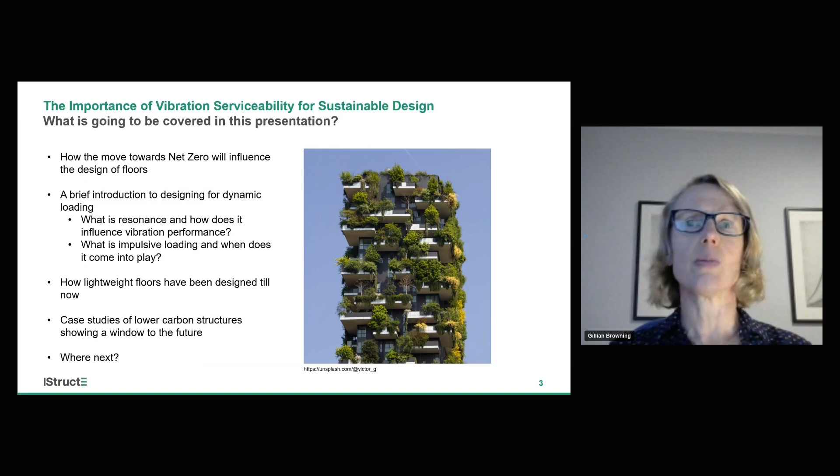So now, because we're on quite a tight time schedule today, I will be following my notes quite closely so that I try not to miss any key points, and also hopefully that will stop me going off-piste, which I do have a habit of doing. So, right, let's get started.

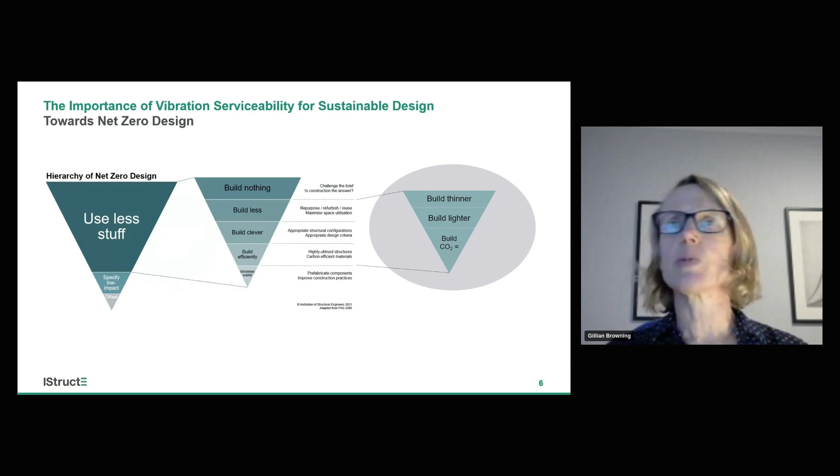This aspect of sustainability, with a focus particularly on floor design, is what we're going to explore today.

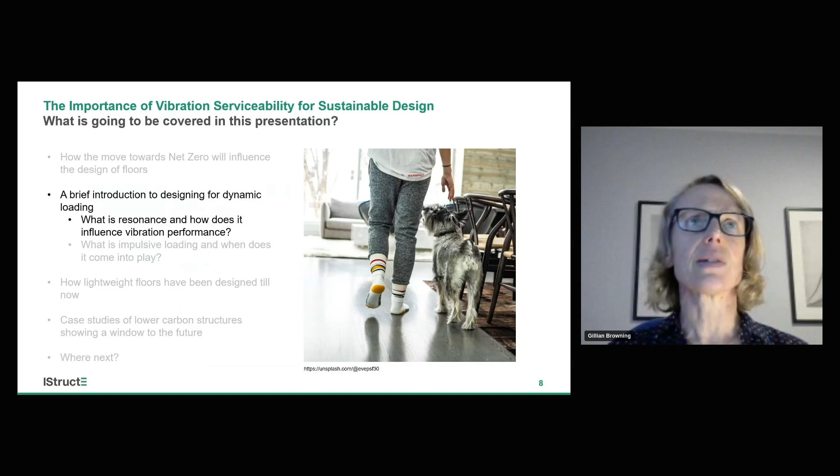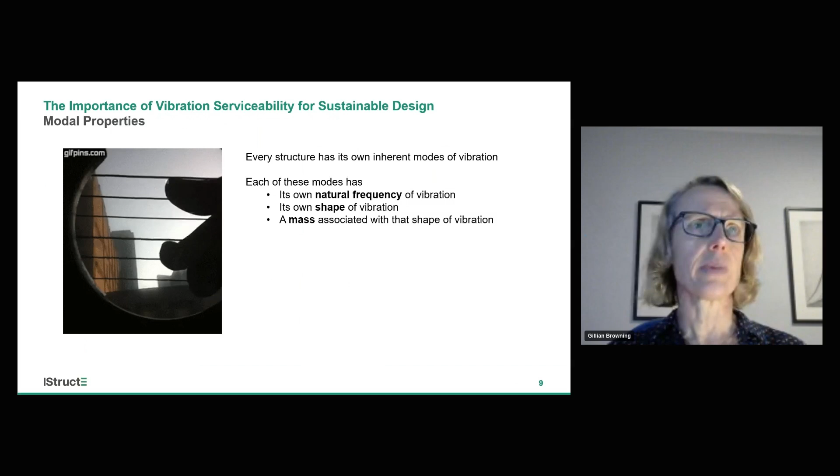One of the key concepts of dynamic response is resonance. Resonance is where an external dynamic force is at the same frequency as one of the modes of vibration of the structure, and repeat application of this external force causes a greatly magnified response.

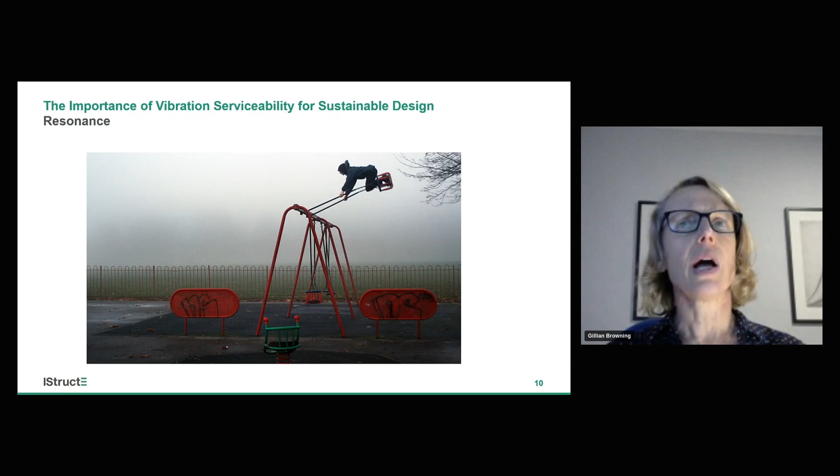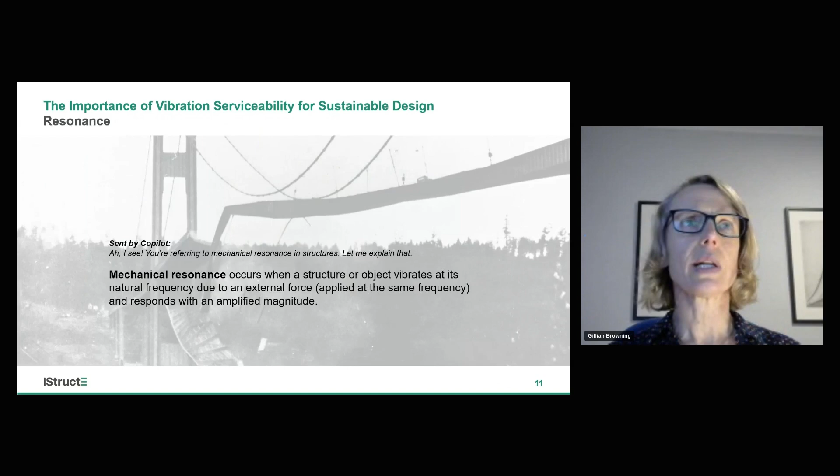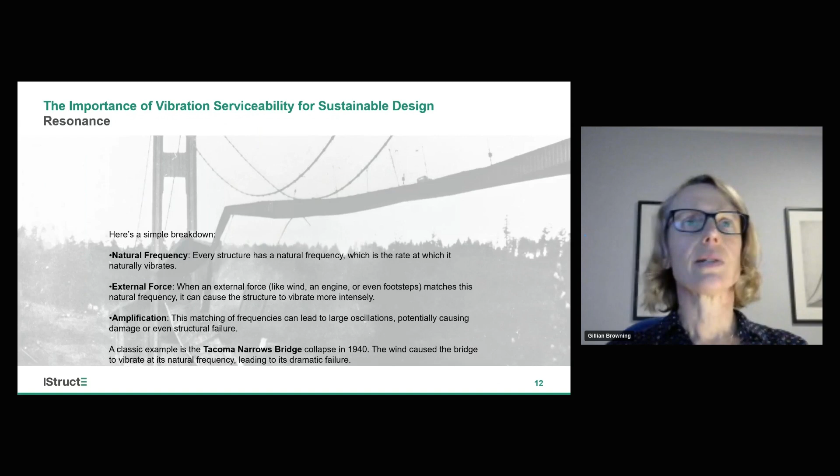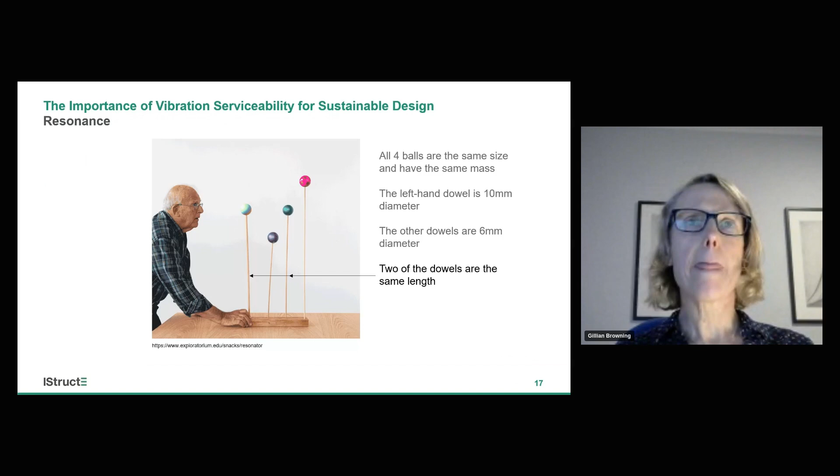But most importantly, all four stick structures have different natural frequencies. The man on the left is moving the base of the device at varying frequencies, and when this excitation frequency matches the frequency of one of the sticks, you can see that it clearly resonates and moves with a greatly amplified response.

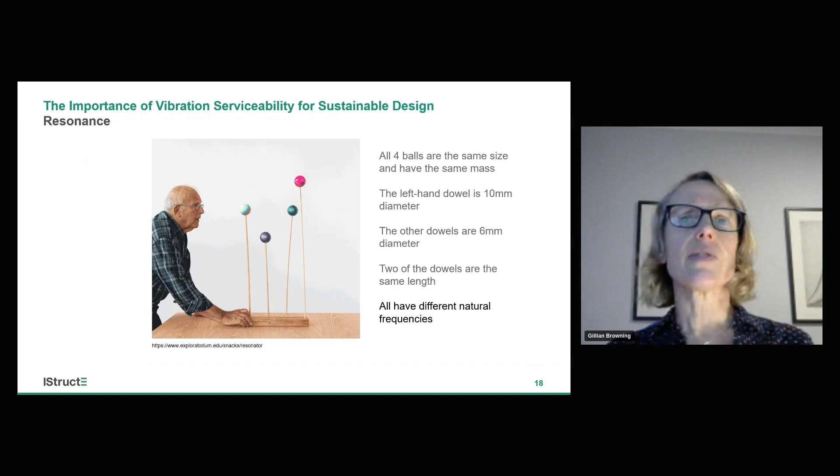Then, as he changes the excitation frequency, that ball will vibrate less. So for each key excitation frequency, only the stick whose frequency is being matched oscillates madly, while all the other sticks remain largely still. This is another key concept of dynamic analysis: when a structure is excited at or close to its natural frequency, you'll get a magnified resonant response, but if it's excited at a frequency away from its natural frequency, the response will be considerably smaller.

The magnification of the resonant response is largely influenced by the damping of the structure. Structural damping is usually very low, between about 0.5% for bare welded steel structures like stairs, up to about 3% for a fully fitted out building.

We discussed the modal properties and found that all structures have their own inherent modes of vibration, characterized by mode shapes, natural frequency, and modal mass. But each structure will have multiple modes of vibration.

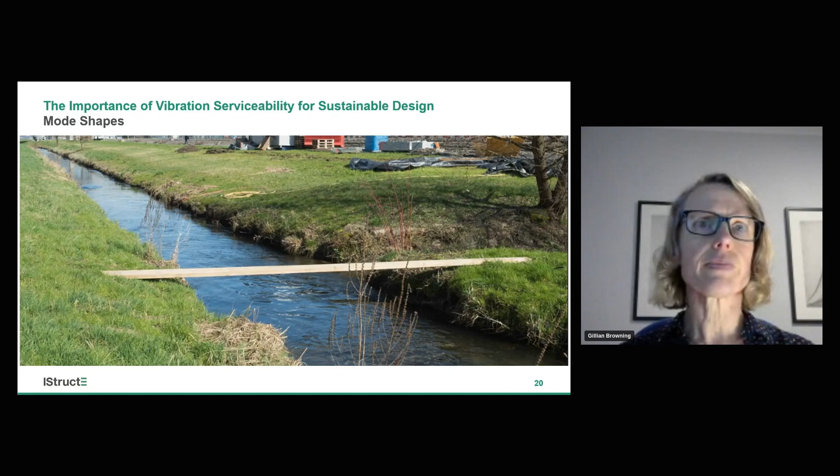Take, for example, this simple bridge. Mode 1 is likely to look something like this, and mode 2 like this, but at a higher frequency than mode 1. Then we have mode 3 like this, which has a natural frequency higher than both modes 1 and 2. But why is this important?

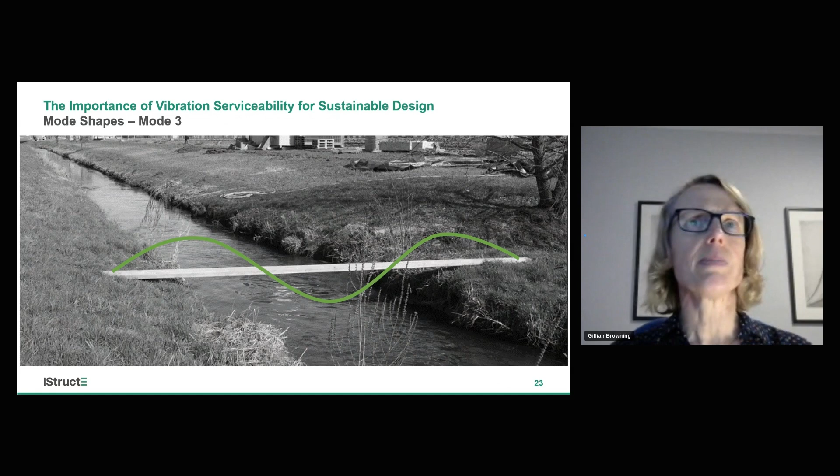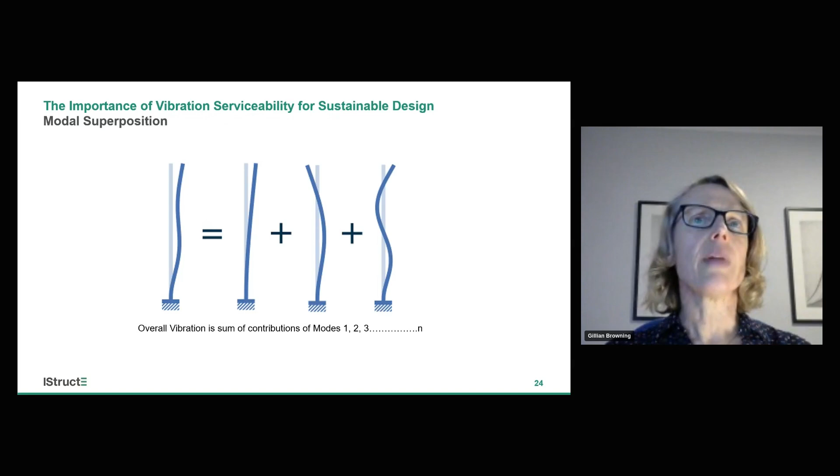The overall response of a structure to a dynamic load will be the sum of the responses of each of these individual modes of vibration. This is what's called modal superposition.

Now we have to take a slight leap forward to fit everything into the allocated time slot. If afterwards you feel like you'd like to understand this section on loading a bit better, I suggest you read the relevant chapters of the UK design guides for floor vibration. I mentioned these before: the SCI guide P354 and the Concrete Centre's guide CCIP 016.

This slide has a lot of information, but the key thing to take away is that the loading is periodic, so it repeats itself at a particular frequency. Because of this, it can be broken down and represented as a series of sine waves, which is what can be seen in the 2 graphs here.

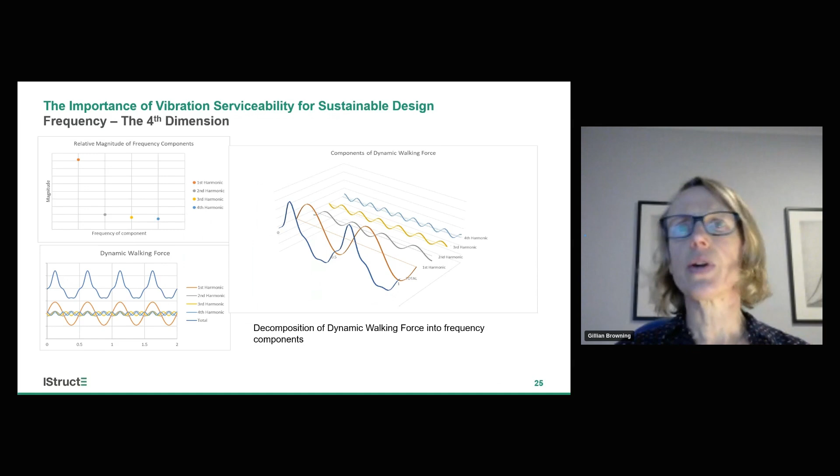These smaller sine waves are components called harmonics, and they occur at multiples of the walking frequency. The first harmonic component matches the walking frequency. The second harmonic is at twice the walking frequency, and the third at 3 times the walking frequency, and so on.

This next graph shows the relative magnitude of these harmonic components of the walking force as used in the UK, and also shows the frequencies over which these components act. Each harmonic component varies with the frequency of the walking, so effectively, the faster a person walks, the larger the magnitude of the force they impart.

What you can see clearly from the graph is that the second, third, and fourth harmonic components are quite similar in magnitude, although the second harmonic is slightly larger. Critically, if we look at the left-hand side of the graph, you can see just how large that first harmonic component is. If we had a resonant response due to that part of the force, it would be really, really big, and that's something we really want to avoid at all costs.

That's why when you look at design guides, there's normally a minimum floor frequency given, shown here by the thick black line on the graph. That minimum floor frequency effectively avoids resonant and off-resonant responses due to that large first harmonic component.

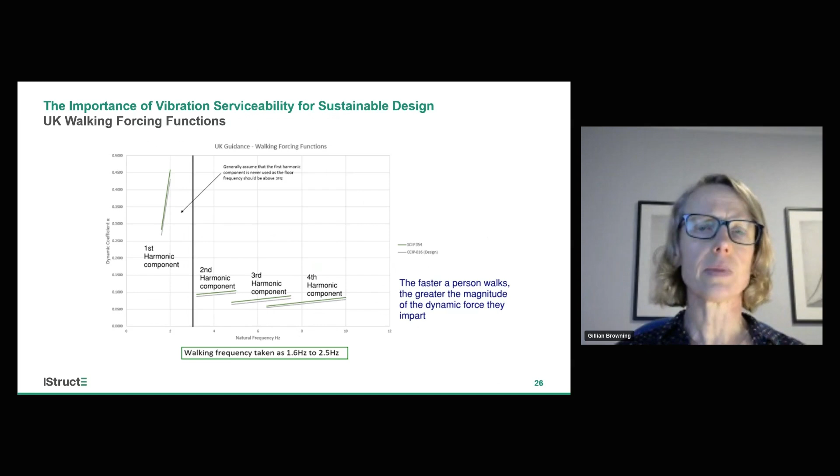So I've just mentioned off resonance. What exactly is that? Well, what I mean is that if you have an excitation close to the natural frequency, for example, at the place where the arrow is shown on this graph, you can still get quite a significant resonant response. This is because, as mentioned before, this peak is based on how much damping you have.

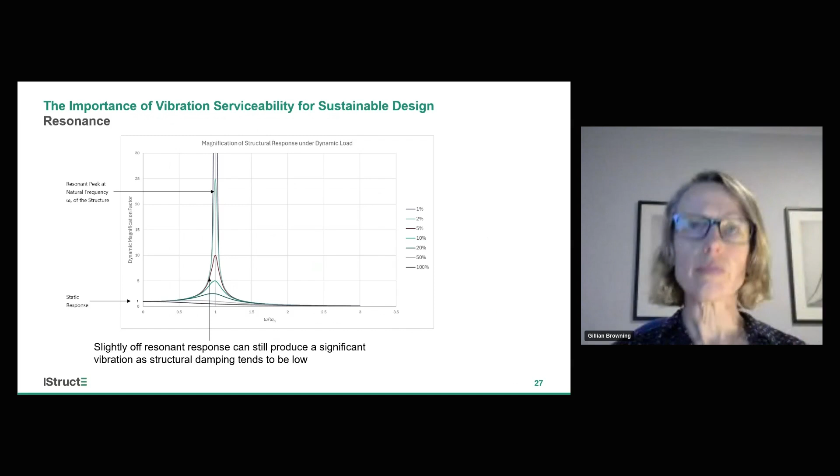Because structures have very low damping, this peak is quite steep and the sides are quite steep. So you can still get, even if you're not quite bang on matching your frequencies, quite a high resonant response. Okay, so hopefully by now we understand a bit more about resonance and the dynamic forces due to walking.

So we'll just take a second to think about the form in which we're going to assess any vibrations generated by this walking force on our structures. For humans and human comfort, acceleration levels have been shown to be the most accurate predictor of tolerance, although perception is individual and everybody's different. Some people are far more sensitive to vibration levels than others. I think over time I've become more and more sensitive, so I'm now one of the most sensitive people I know and can't cope with any vibrations at all.

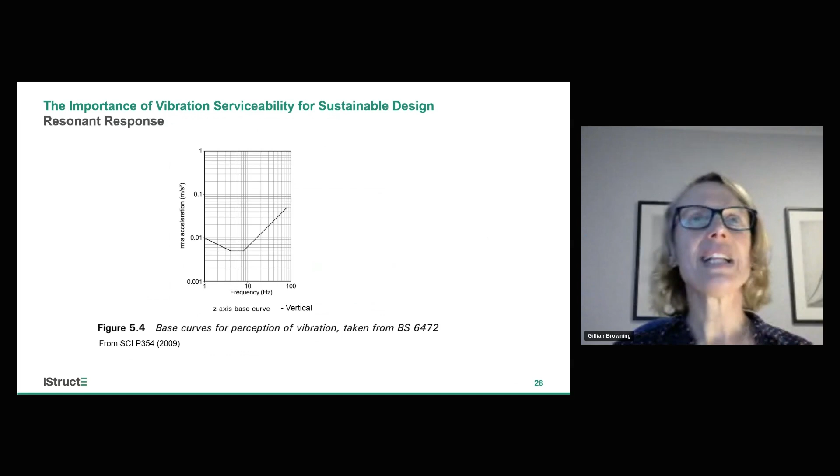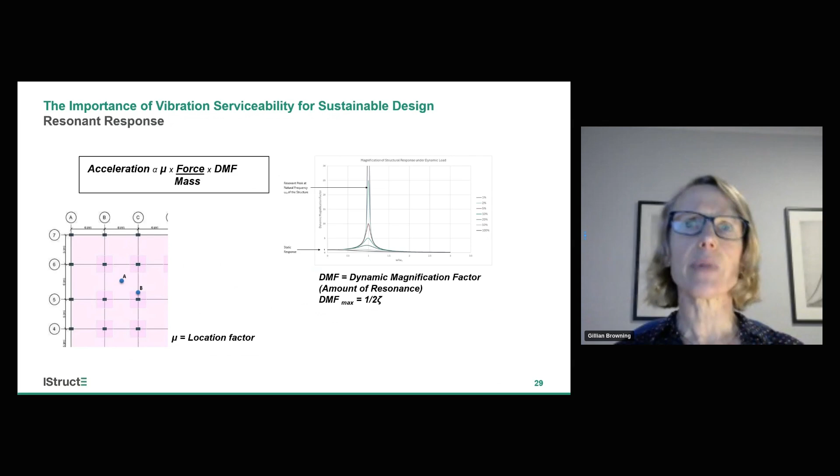So if we're trying to compare vibration serviceability of various different types of floors, the key factors for that resonant response are the mass and the damping. This is given that the harmonic loading components for the second, third, and fourth harmonics are all relatively similar, as we saw in the graph before. And we've already said that we're going to make sure we design to avoid that large first harmonic component.

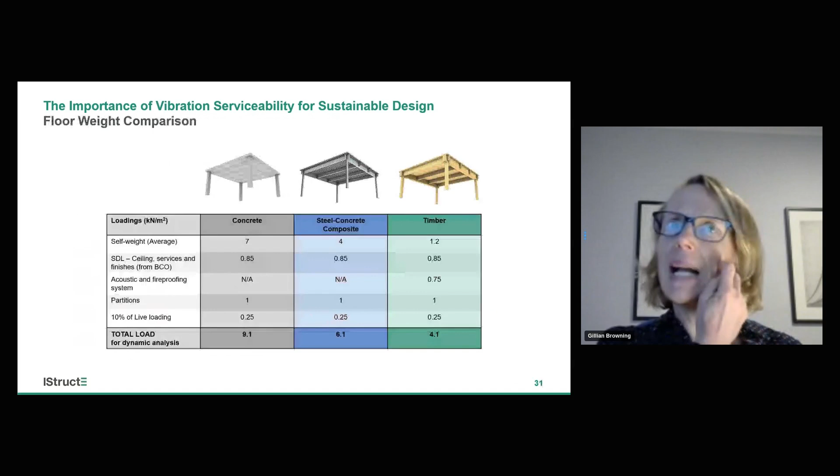Right, so if we then remember back to that table with the three material solutions we discussed at the very beginning of the presentation, where there were considerable differences in weight between the options. We now understand that those differences in weight may translate to how those structural systems will then perform under dynamic loading, given how crucial that mass is to determining the magnitude of your vibration.

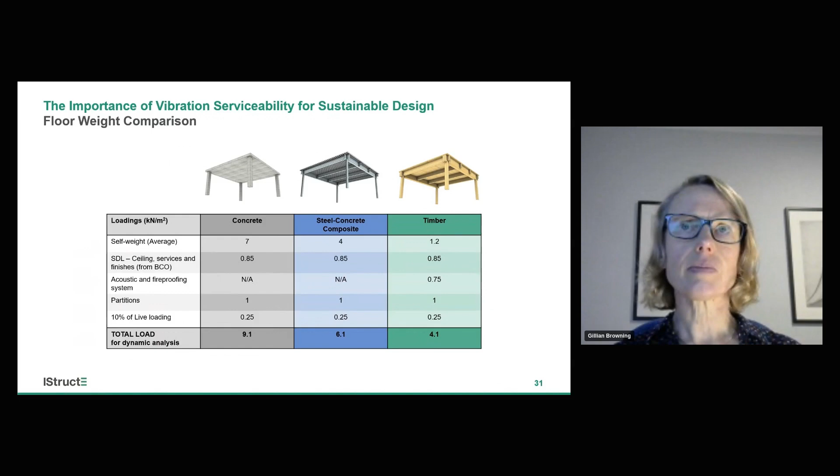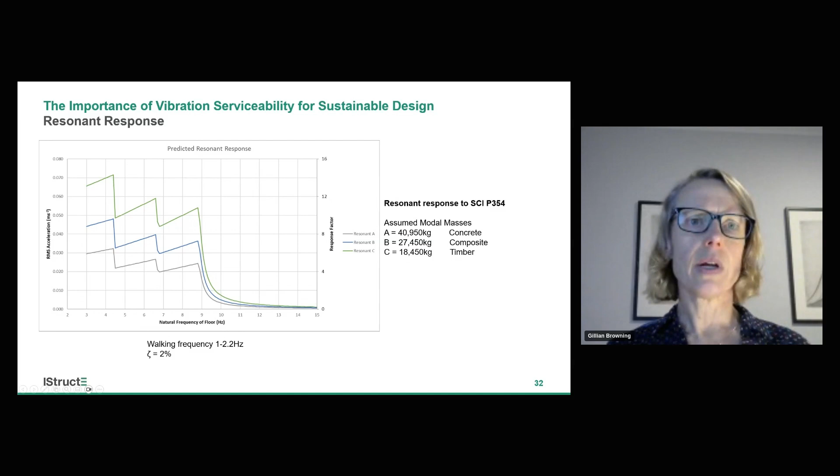Right, so that's resonant response. That's what we've talked about so far. But then, well, what happens to floors beyond this zone? Effectively, what we're going to look at now is we've seen that this resonant response occurs over this portion of the graph, so between your sort of 3 Hertz and 10 Hertz. But what we need to look at is, well, what about this zone? What happens here? And that's what we're going to look at next.

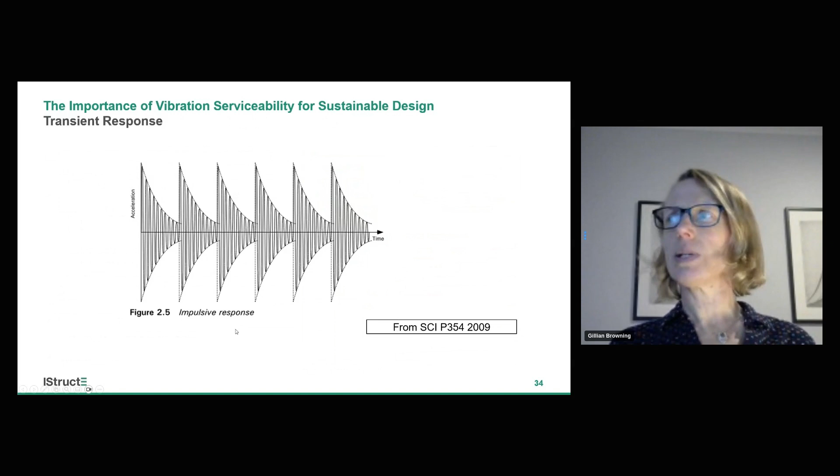So this is a graph that's available in the SCI guide. But I also thought it'd be nice to give a real life example, so this slow-mo video of a springboard shows the extreme of what's happening on the floor under an impulse loading.

When I press play, watch that central diving board carefully and see what happens every time the girl's feet leave the board. You'll see the board vibrate freely, and each time it vibrates in a similar kind of pattern. That pattern is a combination of the mode shapes of the diving board, which are inherent modal properties of that board.

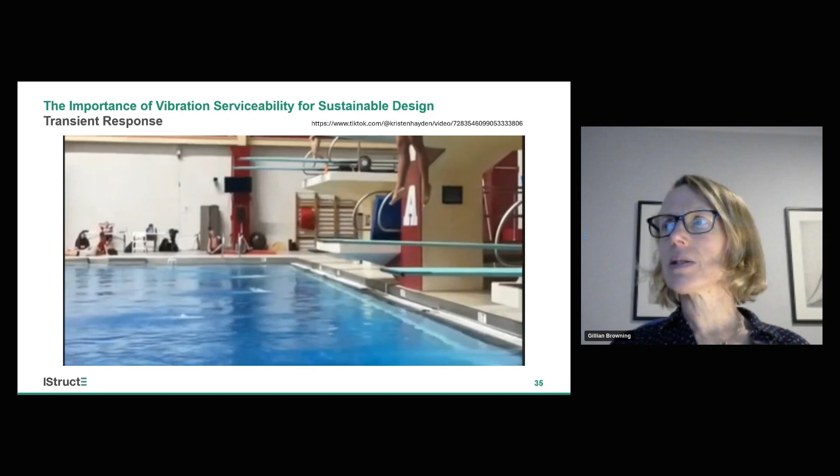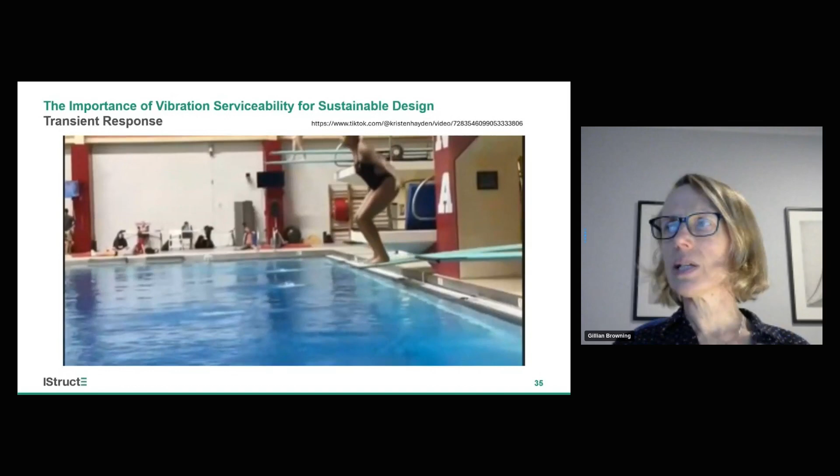Let's try and see if this video works. So we can just see as she lifts off, see how the board vibrates, and then she excites it again by jumping on it. It's a similar sort of pattern, this high frequency waggling around on the board. And then it'll do it one last time when she hits it again.

So we're going to do the same breaking down of the formula. For the transient response, it's the acceleration we're interested in—the magnitude of this vibration—so that we can judge the human response to this impulsive or transient vibration. If we start going through the factors, you've got this same location factor, and then the force, which is the dynamic force due to the impulsive force. What you can see is it's a ratio between the walking frequency and the natural frequency of the floor.

However, in the overall formula, this force is always multiplied by the natural frequency of the floor. So if you remember back to your maths lessons, by doing some crossing out and assuming things get really quite small, you can effectively say that all of this can be simplified to it varying as the walking frequency.

There's also this term in the formula which relates to the damping of the system, but again, going back to the fact that structural damping is always very low, this factor doesn't change very much at all, so we can kind of ignore that. So finally, there's the big mass component. Mass is really important, and as it's on the bottom, the greater the mass involved in the system, the lower the acceleration.

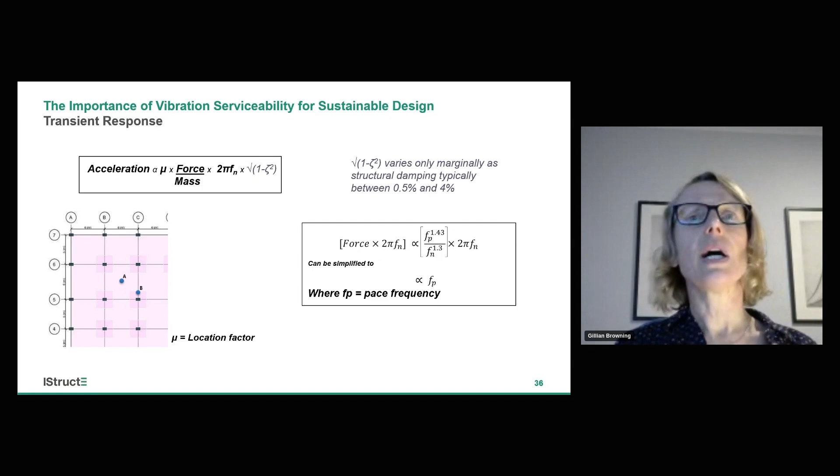So summarizing the key factors defining that acceleration due to an impulsive or transient excitation, mass is key when you're looking at flooring options, similar to before, and that's because your maximum walking frequency is likely to be set by other factors, and it will usually be consistent across the three or so options that you're considering.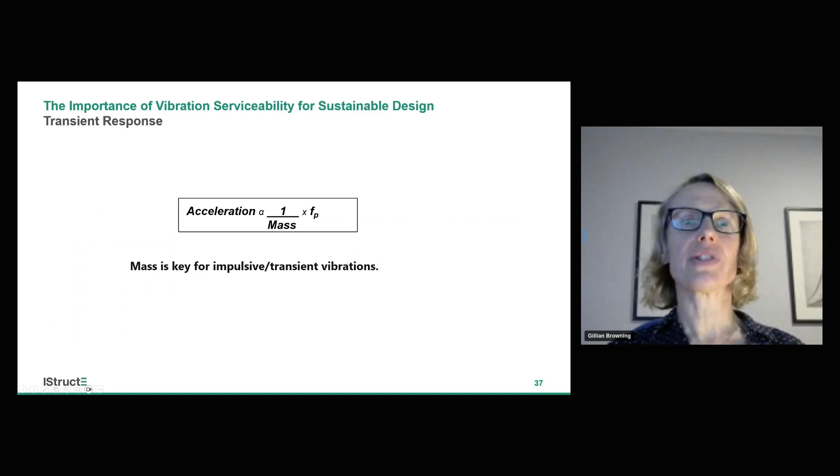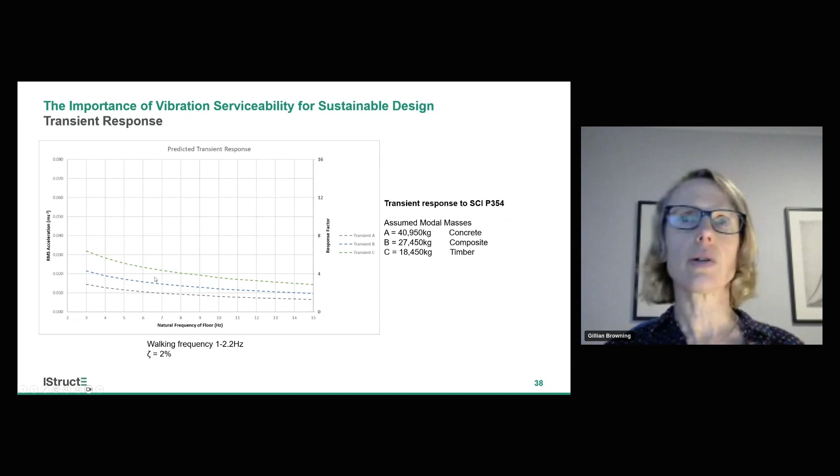And what this graph shows is that as the natural frequency of the structure increases, there's only a slight reduction in the predicted acceleration, particularly in this zone where we're actually focusing on these types of vibration. As before, because mass plays a really large part in this calculation, you can see that the much heavier concrete solution is outperforming both the lighter composite and the much lighter timber options.

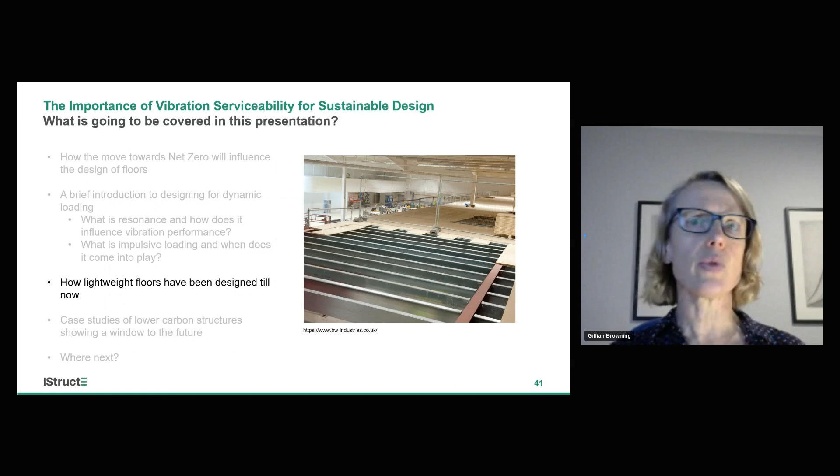We're now going to look at how lightweight floors have been designed up until now, taking the foundation knowledge I've just talked through and seeing how it's been used in the design of lightweight floors. When I say lightweight floors, I'm talking about floors such as the one shown here, with pressed steel joists supporting timber decking. Those floors are covered in Chapter 8 of the SCI P354 guide. We're also going to talk about timber floors designed to the 2004 edition of Eurocode 5.

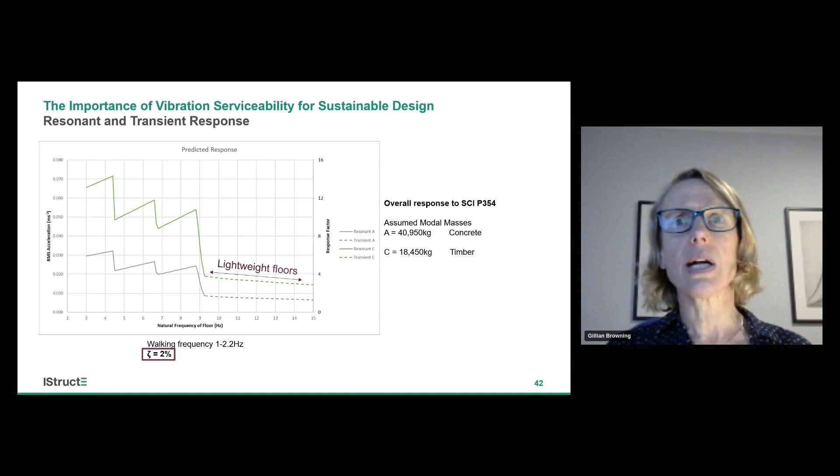So using these guides, a damping value of about 2% would have been used, similar to that used for concrete and steel composite options.

However, when we looked at the formula for the resonant response, there were two key factors: there was the mass, but there was also the damping. So what would happen if we change that damping value for these lightweight floors?

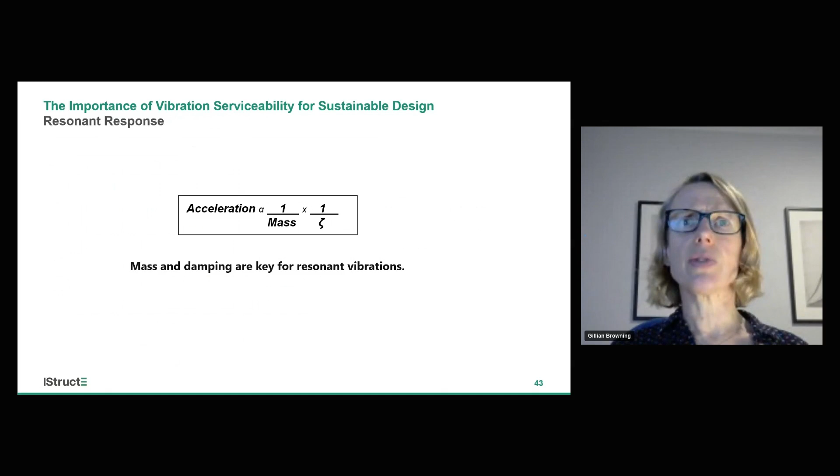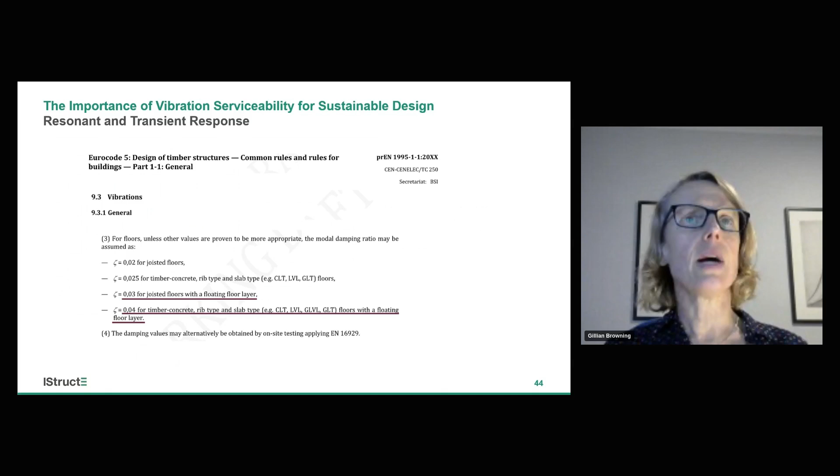The next iteration of Eurocode 5, available to view as a working draft, has an updated vibration section. This is much more extensive than previously, and it's been extended to include offices as well as residential buildings.

One of the key changes is the inclusion of additional higher damping values for timber floors with a floating floor layer. I've copied and pasted it here: the draft EC5 code says that where you've got floors with a floating floor layer, you can get a damping of up to 4%, compared to the 2% damping assumed in the UK National Annex of the 2004 version. So if we think about modern timber floors, quite often a floating floor layer is relatively common because the floors are lightweight and flammable.

You tend to have acoustic and fireproof layers added into that system to make their performance and serviceability under those acoustics and fire requirements suitable for their use.

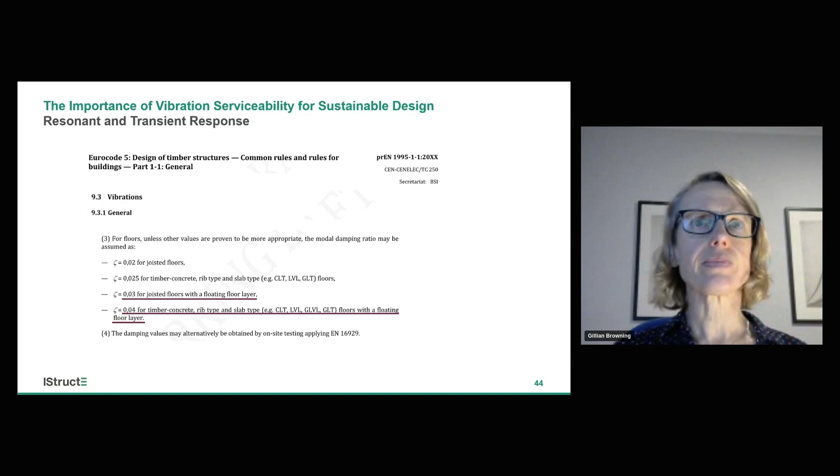So if we look at what happens to our graph—we're back to the same graph—and we change the damping of that timber floor from 2% to 4%, just as suggested in the draft EC5 for a floating floor layer, we can see that change in the resonance section of this graph is the same as doubling the mass, which we could tell from our formula. But it also puts this timber floor performance so much closer to that heavier concrete solution.

The consequence of that is that designing that timber floor to meet an agreed response becomes much more achievable within this resonant zone, compared to what you would have been trying to do with only 2% damping. That 4% damped floor can have a much lower frequency, so it can be much more flexible and use less material than a 2% damped timber floor in order to meet a specific acceleration limit.

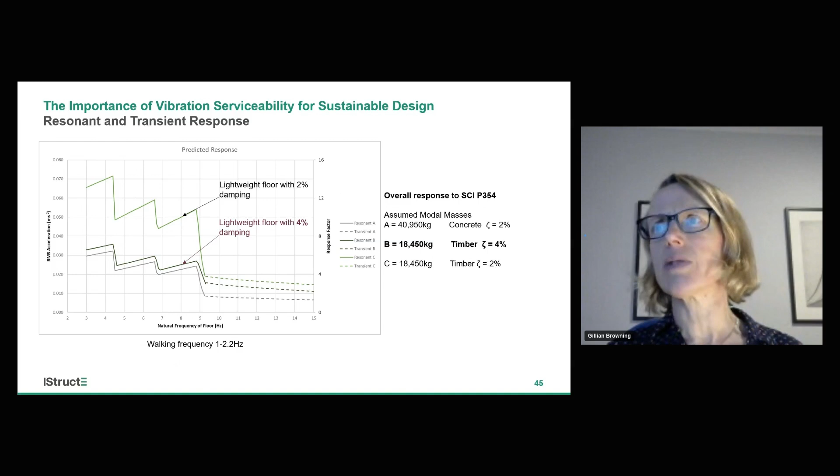So what I'm going to do now is explain that using an example. If we say our response factor limit was 8, you can see this line going across the middle of the graph. If we had a lightweight floor with 2% damping, based on this graph, you'd have to have a minimum frequency of about 9 hertz to meet that response factor of 8.

But if we had a lightweight floor with 4% damping, same mass, same floor, just changing the damping, we can see the whole of that resonant response now falls below our response factor of 8. That means we could potentially use a floor with a frequency as low as 3 hertz, which is effectively 9 times less stiff than the lightweight floor with 2% damping, and that would equate to a fairly significant carbon saving.

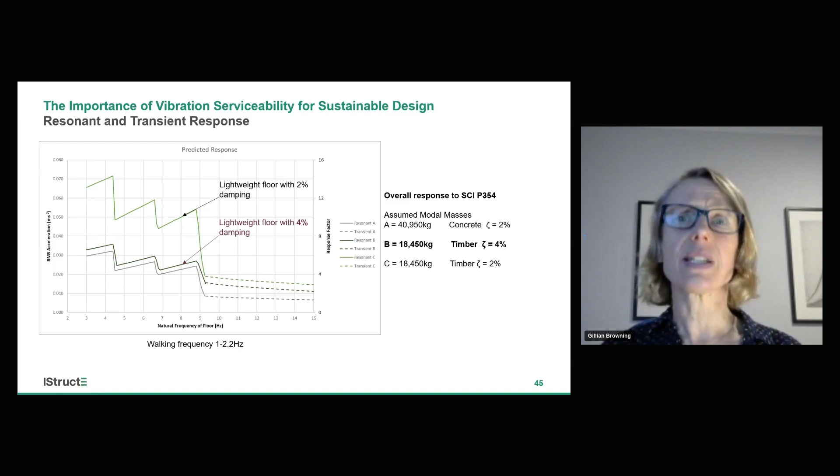So I'm now going to hand over to Will and Camilla, hopefully they're ready, to showcase some of our recent projects. These are ones where lightweight solutions were required, where vibration serviceability became a dominant design factor, and where significant carbon savings were made through collaborative design. So thank you all for listening, and now over to Camilla and Will.

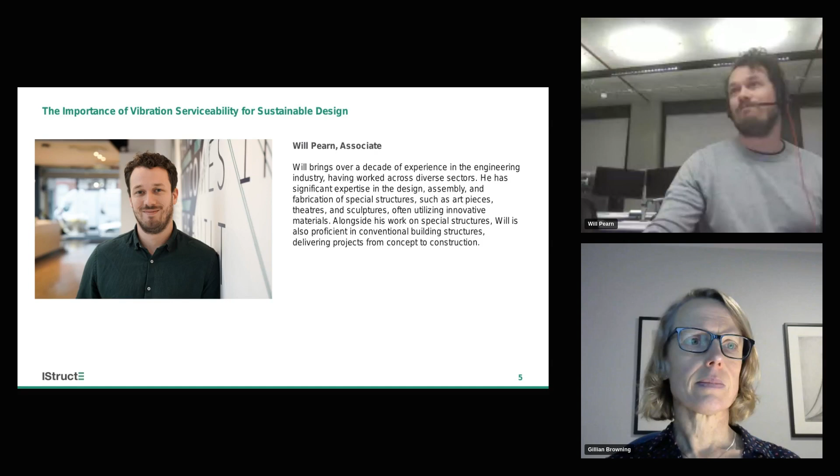So just as a quick reintroduction, I'm Will. I am an associate within the London team for Buro Happold for structures, and today I'll be looking through 2 case studies and the importance vibration serviceability had on sustainability of the design process.

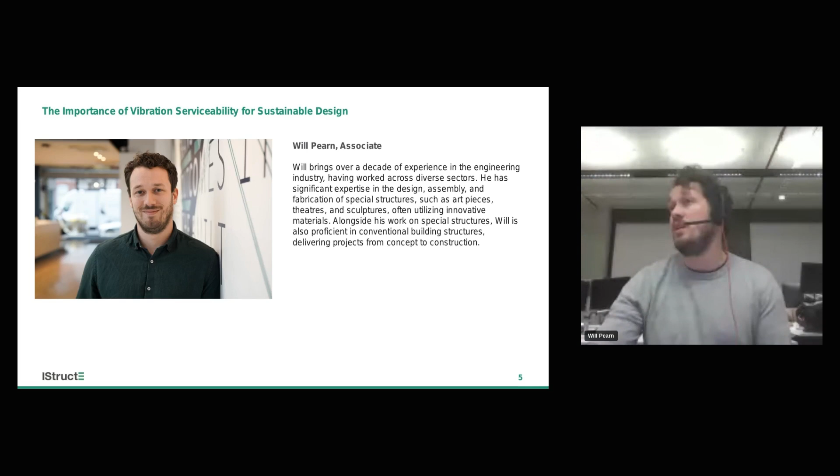Both case studies I'm going to present are in London. They're both reuse and refurbishment jobs. So it's worth touching on this net zero design hierarchy. As mentioned before, in order to minimize the amount of embodied carbon we're putting out into the world, we need to use less stuff, so it's important that we try to reuse and refurb existing building stock where we can.

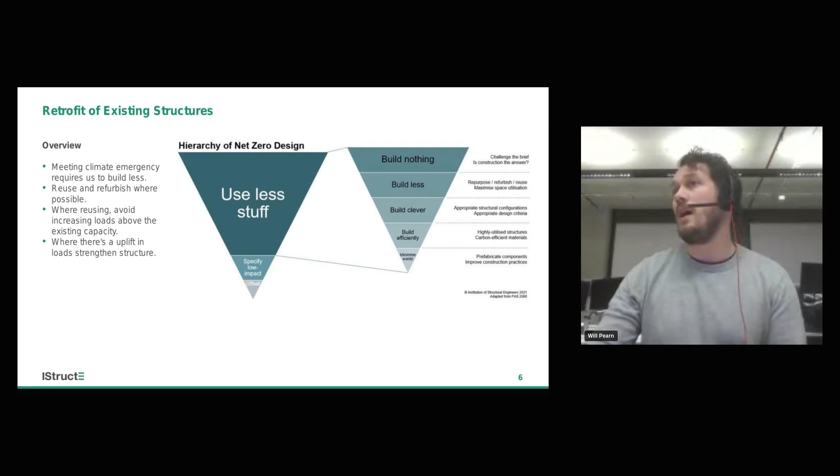What does that mean? If you're looking at buildings in London, say a client says, I've got a building that's 5 stories but I want 6, 8, or 10. If we want to reuse that, we need to keep the loads we're putting on the building within the existing capacity of the structure. That allows us to minimize strengthening and potentially reuse foundations. So how does that end up working in practice?

The first case study is an office in Mayfair, a London refurbishment project. This building was an existing building which utilized some retail, and the client wanted to add 5 new floors to create a new building with 2 floors of retail and the rest remaining office. The project is currently on site, and the ambition was to make it as sustainable as possible, trying to reduce embodied carbon by minimizing any weight we put back on the structure in order to reuse foundations and minimize strengthening.

As such, CLT floors were used as a result of being lightweight, which helped us keep the loads down. The client also asked for the building to be BCO compliant to 2019 spec, which is often a clause or requirement from clients within London, as it makes it easier for them to let to future tenants.

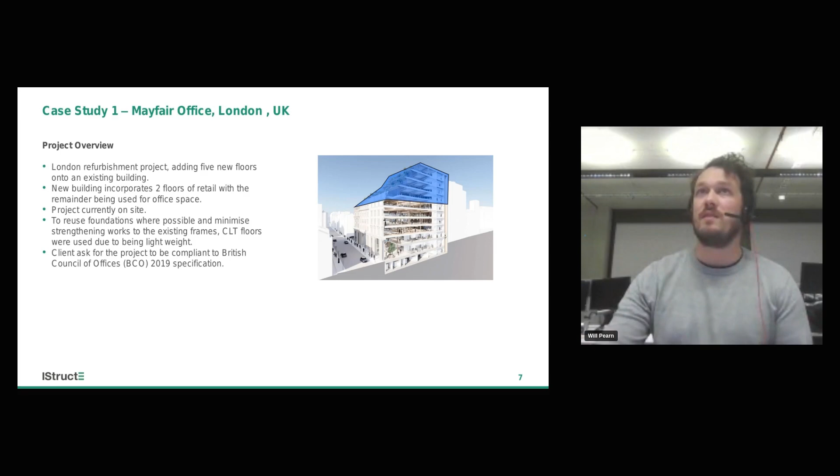So this building used CLT floors. As Gillian mentioned before, CLT is both lightweight and has its issues with dynamics. Also, CLT is flammable and doesn't provide as much acoustic insulation. To overcome these, you add performance layers that often come in the form of fireboard and acoustic layers, which can allow an increased level of damping to be assumed within the design, as per the work-in-progress timber Eurocode.

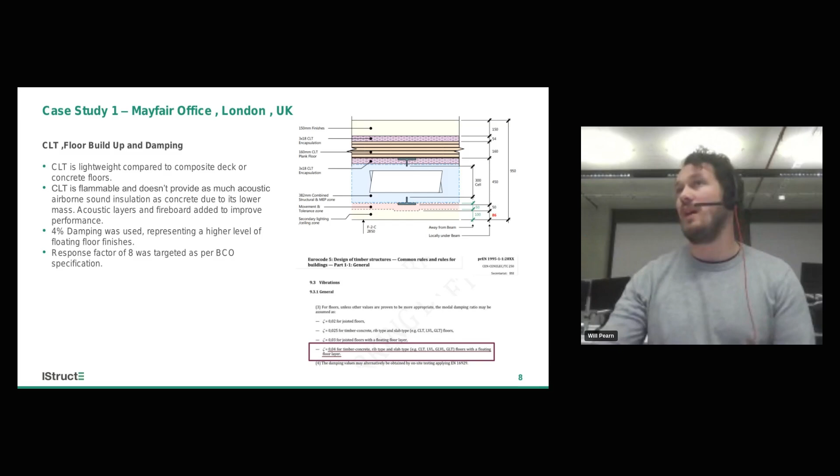For this project, a response factor of 8 was actually targeted as per the BCO specification, which there are probably conversations to be had about how applicable that is for lightweight structures.

So on to the dynamics of this project. The floor is driven by dynamics rather than ULS or SLS statics, due to the nature of the lightweight floor and spans. The first vertical mode of the floor is about 10 hertz, so it can be considered a stiff floor. In the final design, the floor response is driven by transients.

One of the first things we looked at was the impact of increasing the damping on the floor. From the previous build-up, you have quite a lot of performance layers, so 4% damping could actually be justified. That allowed us to reduce the response factor from 35 to 20, which brought us a long way there, but still quite a way to go to reach 8.

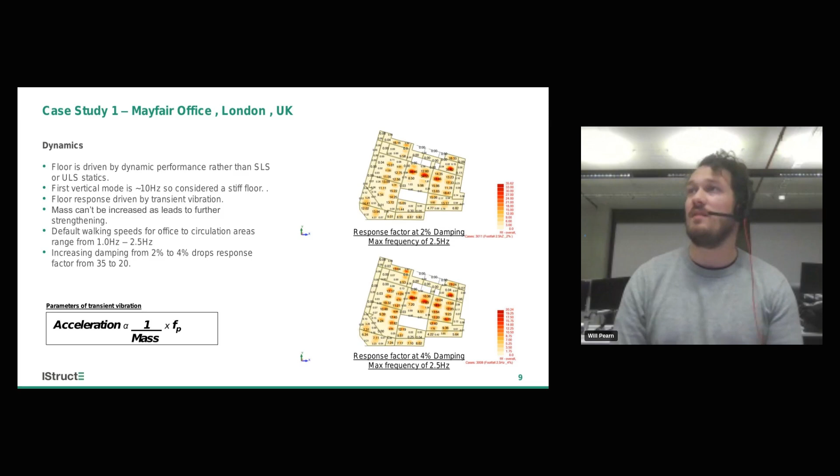So one of the next things that we looked at was an office. It's kind of an office, so how fast are people going to walk in an office? Initially, we were assessing the floor up to 2.5 Hertz. 2.5 Hertz works out to about 6 kilometers per hour walking speed, assuming about 0.7 meter stride length. So it's quite fast, and I don't think many people work in offices generally at that speed. Circulation areas such as corridors, yes, but not typically around the offices.

So we then started looking at what happened if you reduce the frequency, and it basically allowed us to bring the transient response down to just below 8 for all of the office areas. As per the parameters highlighted with Gillian before, the transient vibration response factor would be driven by the mass and the frequency. We couldn't increase the mass because it would go against the whole point of sustainable design, where we're trying to minimize weight to reuse the building. So we had to genuinely look at the frequency and think about what was viable and accurate.

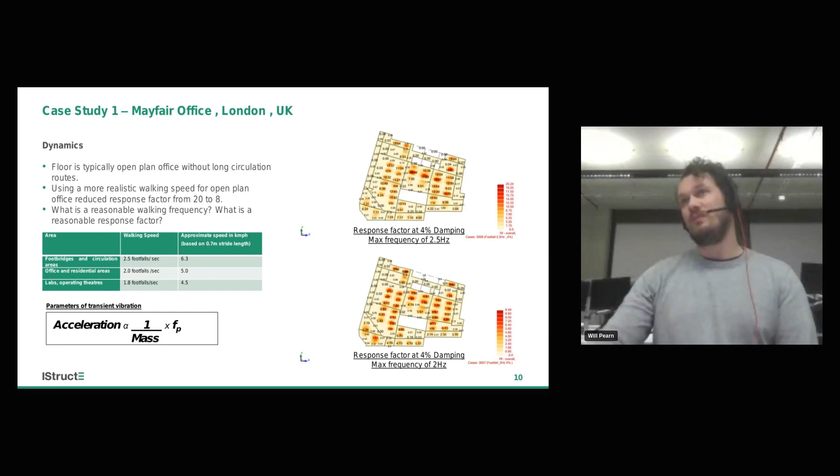The second case study that I want to discuss is Gresham. Gresham is slightly more conventional than the Mayfair office. It's the redevelopment of an existing building, again where we've added 4 new floors on top. The project is currently at RIBA stage 4. The client also wants a BCO specification because it makes it easier for them to let to a tenant, and again, wanting to hit a response factor of 8. Spans are about 13.5 meters to match the existing grid, which from my memory was also done to a previous version of BCO.

The slabs are lightweight composite deck, and that was chosen to minimize strengthening and to allow for reuse of foundations. CLT was considered for the scheme but was ruled out as it actually resulted in heavier floors because of how thick the CLT had to be to get the spans to work, and also extra complexities such as fire, insurance, and acoustics. So as such, they went with a lightweight composite deck.

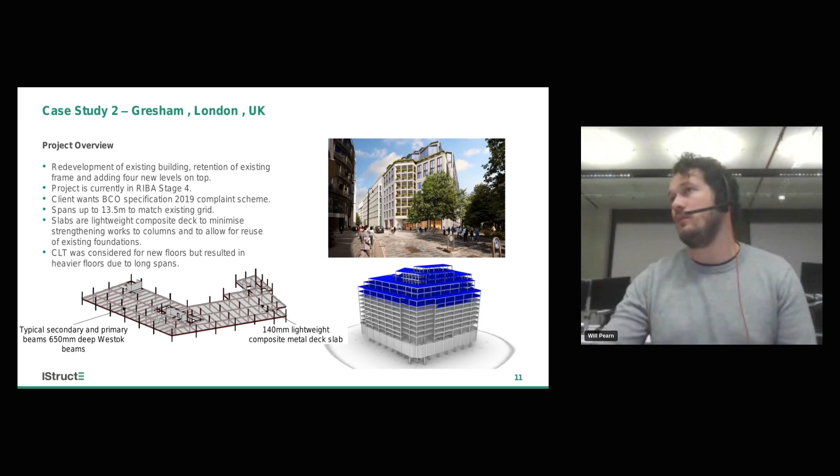This team, during all of the design development, has always been looking at dynamics, and as the floor plates have been entirely driven and sized for dynamics, because that is the driver, not SLS or ULS statics, it has allowed them to be in a position going to RIBA stage 4 where they've been able to highlight areas where the floor is overperforming the response criteria for the client, and has allowed them to start tailoring their scheme to try and minimize steel tonnage and help reduce embodied carbon.

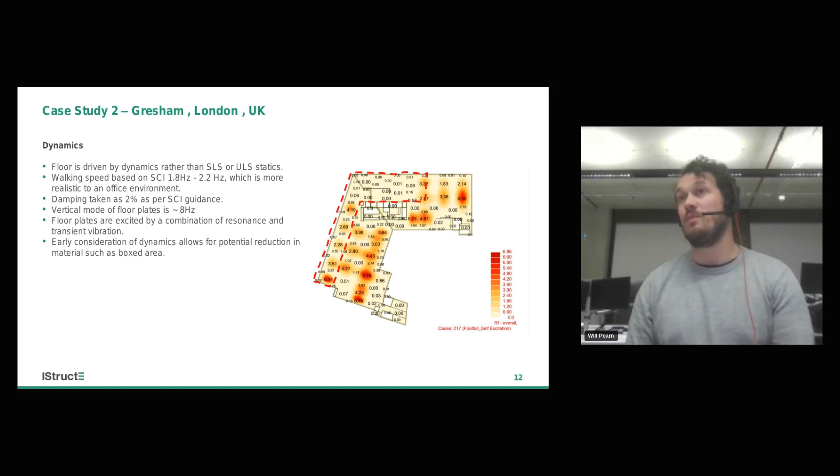Which just highlights the importance of early consideration for dynamics for potential reduction in material when looking at lightweight floors, and this is increasingly prevalent within reuse and refurbishment jobs. Thank you very much, I'll hand you over to Camilla.

Thanks, Will. So, hello everyone. As my colleagues, I'll quickly go back again.

Camilla, I'm not sure if you're hearing me, but it seems like you're a bit stuck for us at the moment. Do you hear me? Yes, I can hear you now, but I can't see you yet. You can. Should I reload? Let's wait for a second. Yeah, you appeared, that's perfect. Okay, thanks, sorry for that. No problem, for me it was showing normal. I might reduce the quality here as we talked before. Yeah, is it working? Yes, that's perfect.

Okay, perfect. So yes, as I was saying, I'm working on some lightweight floor analysis, vibration, but also different structures and some special cases where we also need to look into vibration in a more specific way, and that's what I'm going to share with you today.

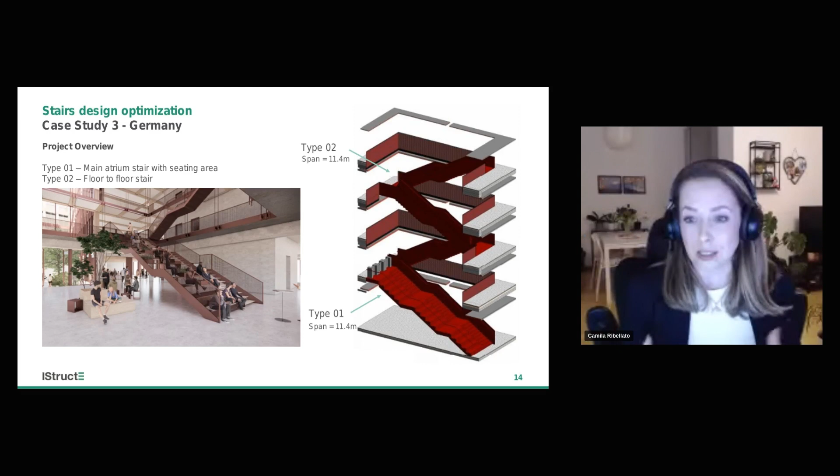So the first case study that I will share is actually a set of staircases, and here we have very similar dynamic behavior from human excitation as Gillian showed, but with a different view in terms of how these will behave when people are going up and down. In this case, we have quite a big span, 11.4 meters, and two different sets of stairs. Today we'll show the conventional one, not the one where people are sitting, because it can bring a real overview of how much you can improve the behavior and still save carbon. So let's get to it.

So here is a bit of the basis of design. It goes a bit further than what Gillian explained, because she explained more related to floor vibration. Here we have the same concepts in terms of the walking force, but what changes is the frequency range of this walking force, due to going down and up, we have a different impulse.

We have two harmonics, not four, as we had in the previous analysis. It's also important to mention that the damping for this case is very low because these are steel stairs, but the code advises us to consider something around 0.5%. We have considered 1% due to the handrails and finishes on the stair, but it's a very important point because it changes our results in terms of acceleration.

On the right, we have the acceleration criteria from SCI, which shows an overview of what's acceptable, what the human perception is for different uses. In our case, we have a heavy use for stairs because it's in an office building, so our target response factor will be around 32.

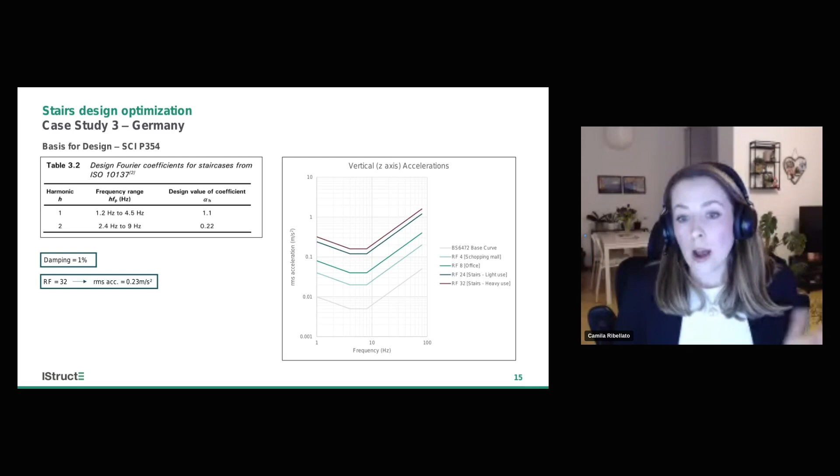So how do we start? We start by trying to make it work in our regular way with our structure and its elements, related to the mass that Gillian explained before. When we try to make this stair work by ULS and SLS, the structure could be much reduced, but it doesn't work dynamically because due to its mass, long span and shape, it will vibrate when people go down. So we need to increase the members and make it much stiffer and heavier, so it works by itself and people don't feel vibrations going up and down. In this case, we have quite big profiles.

So we have a frequency of 9.9 hertz and a response factor around 31, which is smaller than our criteria and limit. We'd be okay on that, but we have a very heavy stair with 6,000 kilograms, and the utilization of the profile is quite low in ULS and on deflections, because the design is basically driven by the dynamics. It's also very carbon intense.

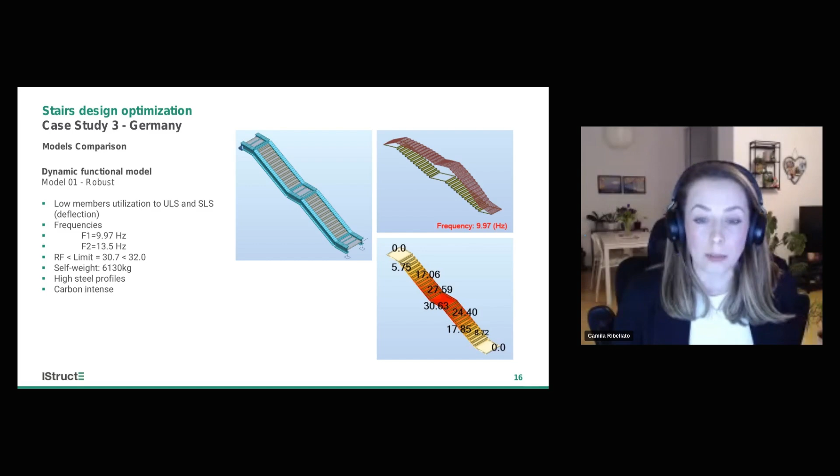So how can we improve that and make a structure where we can have lighter stairs but still functional from a dynamic perspective? We can actually count on technology a bit and use a system of tuned mass dampers. Here we have the second, the optimized design let's say, when we use a TMD system on the landing of the stairs.

In this case, we have higher utilization on the members because the member is smaller. They are more elegant, as the architects also wanted, which was one of their wishes. If we look now at the response factor, accounting for the weight of the damper but not the damper itself, we would have a 277 response factor value.

Of course, to design an element like this, when you have different equipment, you need to align with the company. In our case, we've always been in conversations with Gerb, the company that supports us in Berlin, at least with this design. You cannot just design by yourself; you need this correlation with the company that will support you.

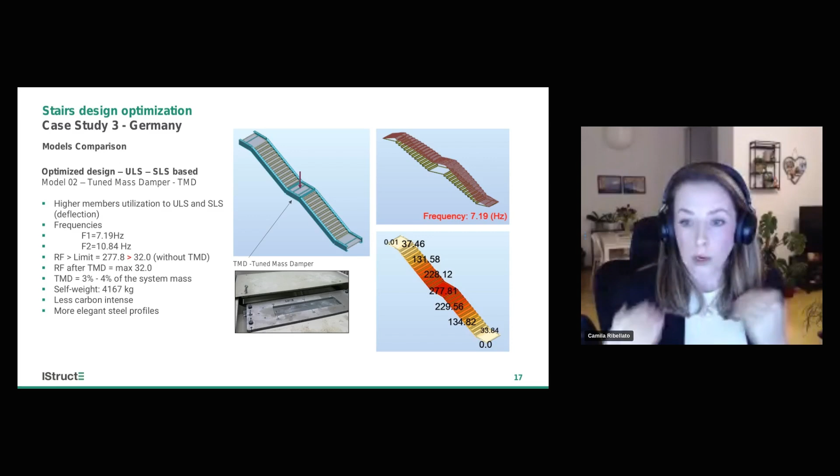But this stair, for example, has much lower carbon values, smaller elements, and the weight, as you can see, is basically 2,000 kilograms less than the other one. We're going to have a further slide showing a bit more in detail what we gain with that. But if we go now a bit into the response comparison between the two stairs to understand what happens, it works with the damper.

In the first one, we have the robust stair with big profiles, and I wrote there the frequency of walking. As you can see, since it has more mass, the peak of the response is actually between 4.5 and 5.5 hertz, which is outside the walking range for people going up and down stairs. That's why it has a favorable result in terms of acceleration, because this stair has so much mass that the peak goes outside the walking frequency that would create resonance.

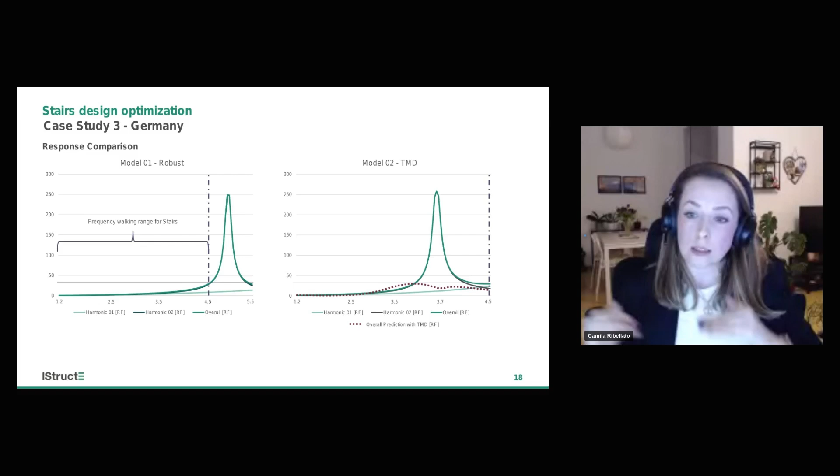Although in the second one, when we have a much lighter structure, the peak would happen around 3.7 hertz, which means that when people walk on these stairs, they would actually feel the vibration. But when we implement a tuned mass damper system, you can bring this curve immensely down through the damping system. What you see in this dashed line is just a prediction, because the final curve could only be seen after testing the stair itself. But it would reduce these curves a lot, and this acceleration would never go to the peak it would reach without the damper.

Here we have a comparison in terms of carbon emissions and cost. By the addition of the damper in this very simple staircase, we have a reduction of 28% in carbon emissions, accounting for the carbon emission of the damper system itself. So it's the complete system of the stairs, and the cost is around 10% reduction. It's actually win-win in all situations, because you are saving carbon and also saving money for the client.

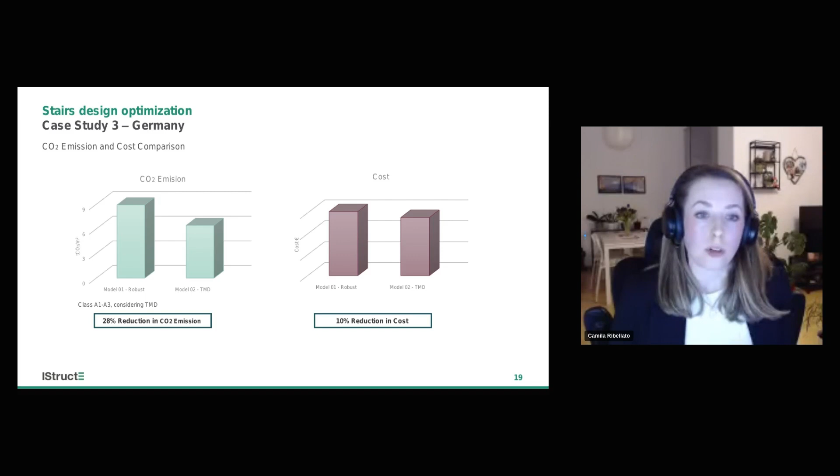As the second case study I want to show you, it's actually Südkreuz here in Berlin, and that was the inspiration of the architect. They wanted to build a kind of forest of trees inside this atrium. It was an office building, and these trees would be connected with different footbridges that are stairs at the same time due to the difference in the leveling of these trees.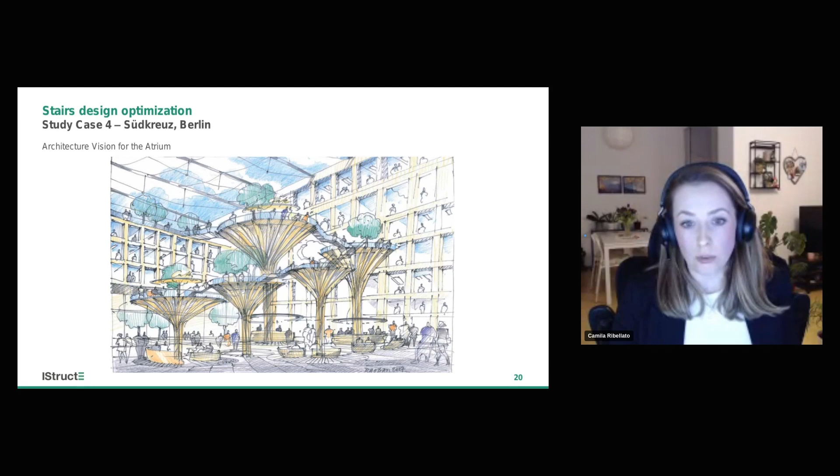If we look at a top view of this system when it became a real project, you can see 4 of these trees that have different heights, and these platforms that are like footbridges and also stairs connecting each one of them. This system also serves as a lateral stability system for the stairs, and vertical due to the walking people and vibration caused by people.

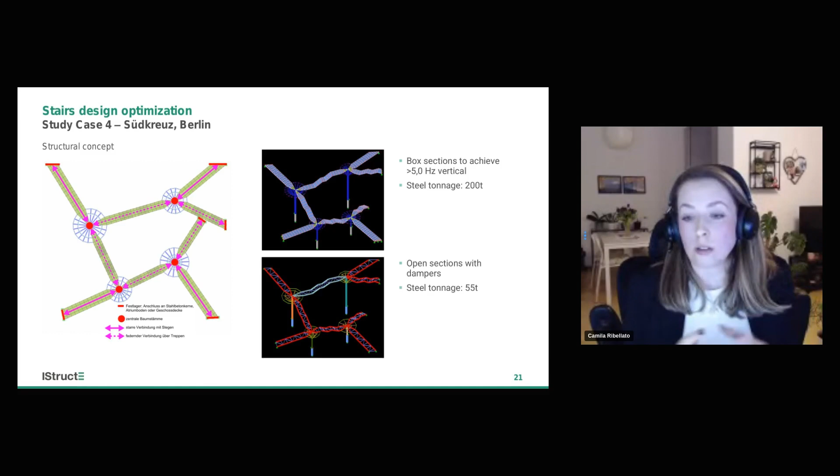In this case, we don't have a final number between both systems, because it was so evident that damping the system would improve so much the dynamic behavior that the first analyses were not completed to the detailed level. But you can see some numbers: in the case without the damping system, to keep the structure in an acceptable range of vibration, it would require around 200 tons of steel. With the damping system, a more refined detailed design, it was around 55 tons, which is a massive difference.

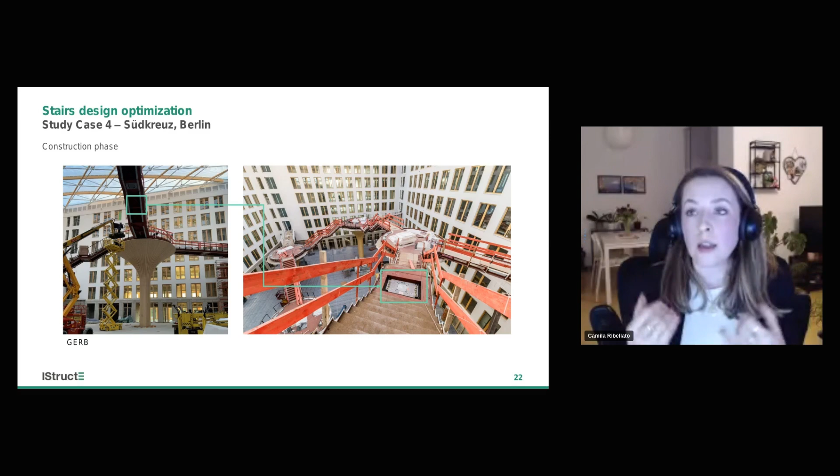Here we have the execution, the construction phase. You can see the positioning of the dampers in the landing of each one of these stairs and footbridge elements. Of course, it's tuned after the execution and after the finishing, so they can ensure that the accelerations will meet the criteria. Then here we have a final picture of the project after being done and in use.

That's actually a very nice case where you can reach all the goals, where the client is happy, the users are happy, the architects are happy, and we have done the best job that we could as engineers, reducing carbon and increasing the structure's usability, making it better for everyone.

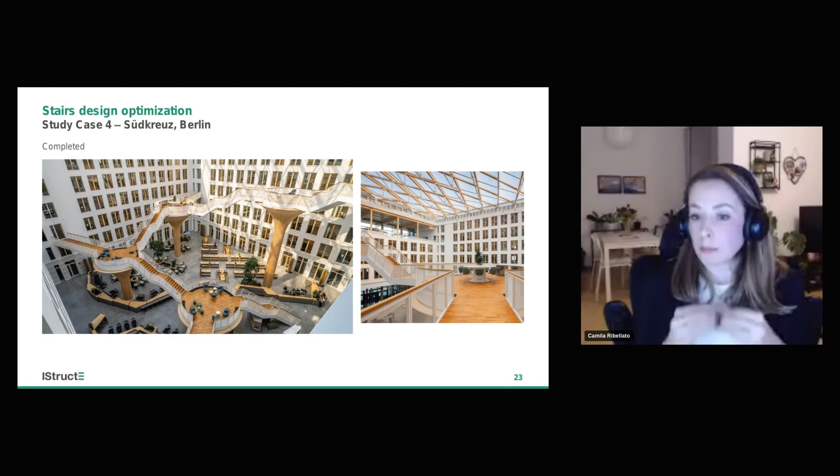So what does the future hold? Serviceability design in all its forms will definitely become a far greater decider in our structural solutions with the drive to net zero design. Lighter, thinner and lower carbon structures are required to meet this goal, but are we suitably prepared for the implications of this?

Our current design guides are based on research from over 20 years ago, and those design guides were never imagined to be used in the current landscape where you've got vibration serviceability being the key decider for everyday floor design. As such, those design guides are now outdated.

We saw from the case studies and analysis studies that simple assumptions such as the levels of damping and walking speeds can have a massive influence on the predicted accelerations. So lightweight timber floors can be shown to give similar levels of vibration to traditional concrete and composite floors.

But humans are sensitive creatures. Does a 6 Hertz resonant acceleration on a concrete floor feel the same to a human as a 6 Hertz resonant acceleration from a much lighter floor with additional damping?

New guidance regarding mass timber structures tends to build off publications written for traditional materials, but is that the right thing to do? Research suggests there's an argument for using different acceptance criteria for higher frequency floors, those exhibiting a transient and impulsive response. But is there also an argument that perhaps different acceptance criteria are necessary for lightweight floors?